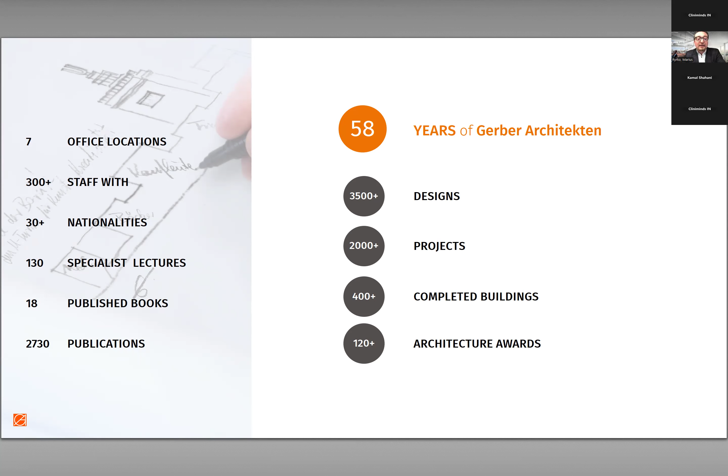Our office locations form a triangle of where we currently are. As you can see, the base is in Germany, very strong. I'm based at the headquarters in Dortmund. Linda is in the Münster office, which is the healthcare specialist office. Then we have other office locations: we've been in Saudi Arabia for around 20 years, with an office in Riyadh and an established entity now. And we've been in China for about 9 years, running an office in Shanghai.

What that triangle of international activity means is that we benefit, and I believe this makes us unique: we benefit from the German engineering approach to how we design buildings and how we see construction. We've done mega projects in the Middle East space, very large scale, very high profile. And we've also built almost 1 million square meters in China with high rises, a very dynamic and highly competitive environment. We do hope that next time we sit together, we can say we've also got an office location in India, and let's see where that journey takes us.

Our activities currently stretch from China, Vietnam, also India, Central Asia. We have activities in Central Asia and the South Caucasus. We're also in the wider Middle East and in Europe.

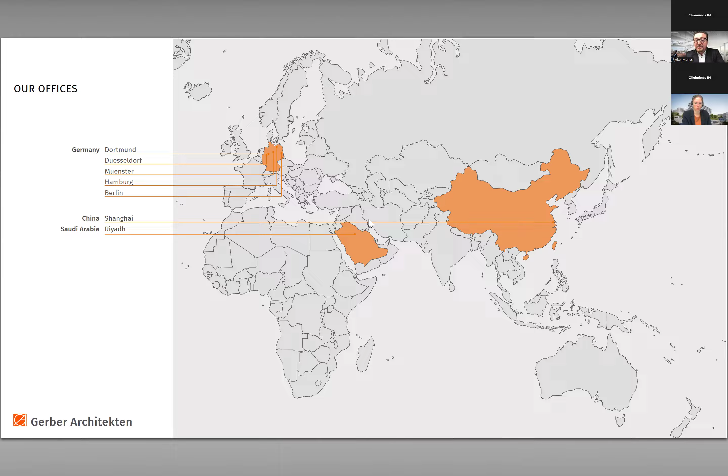This is the board of directors, together with Professor Gerber, Thomas, and myself. We run the international company. These two gentlemen run the German entity. Linda, today here with me, is director at the Münster office, as Kamal already introduced. We've got about 12, 13 directors running responsibly either office locations or certain sectors. And then we've got projects, and projects normally have project leaders, and that's how we're structured.

It's fairly straightforward. So what do we do? We are architects first and foremost, so we are interested in buildings, but to get there, we often have to be involved or lead certain topics on wider urban scale. So that is urban design. We've done design guidelines for various cities. We've designed also cities or city quarters for that matter.

Landscape is very strong. We're currently working on the King Salman Park in Riyadh, which is a mega urban regeneration project, 4 times the size of New York Central Park. Sustainability is an inherent topic in our world, and I will come to that later. We've made this one of the focal points of our presentation today. And whilst today is about healthcare, it's one of our leading sectors, also one of our growing sectors, particularly in the post-pandemic times.

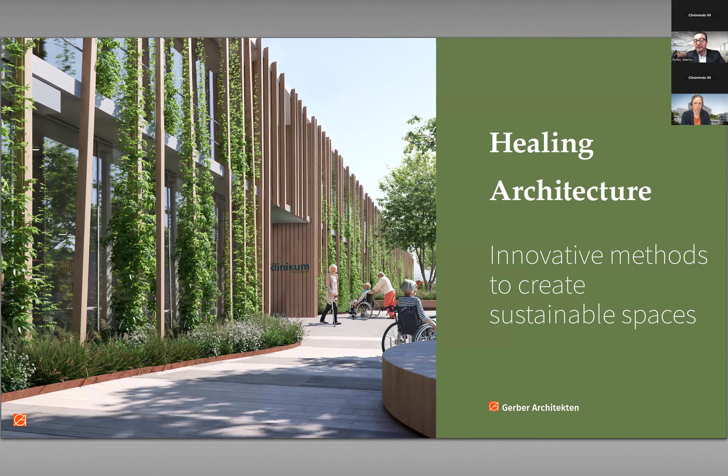Now, coming to today's topic, healing architecture, what we want to do is to show you on certain projects that we're doing how we approach our design, how our design thinking materializes in the projects, how we see it through, and what we're trying to achieve. And we'll do this with a focus on sustainability.

At this point, I would like to quote Professor Gerber: "Sustainable thinking and sustainable action is necessary in all areas of our lives, and of course, particularly in our work. Sustainability is crucial for our cities and, more importantly, for the people."

And, you know, I've been doing this also for nearing 25 years now. Sustainability has been a topic since I was at university. It's been ever more important in most of the countries that we're in. It's becoming a critical topic to design and build our buildings in a way where we watch out for the resources that we use, for the energy and the water that we use, and how we use them and how we reuse things. So it's become an ongoing topic.

Gerber Architekten are also a founding member of the German Sustainable Building Council. I think that's probably about 15 years ago, but we sit on many other panels and organizations, the European Association for Sustainable Laboratories. We run highly sophisticated quality management systems, and we also certify. So we see ourselves generally as a general design lead, and we coordinate, and we like to coordinate other participants on the design.

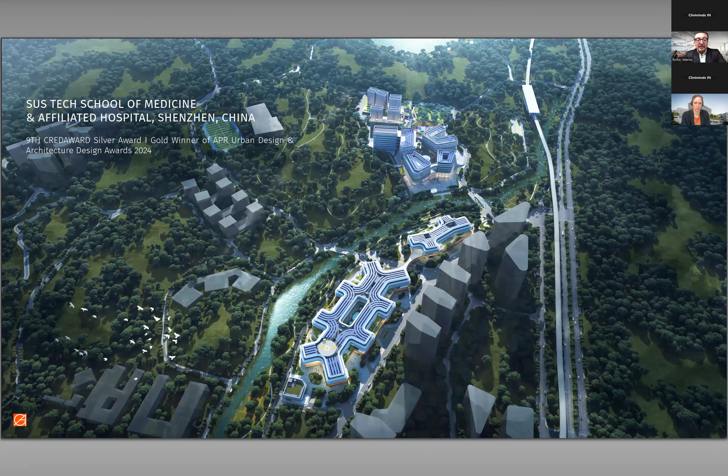Let's talk about projects now. I will take the liberty and start with a project because that's also been part of my time in the last 3 years. This is the SUSTech, the Southern University of Science and Technology School of Medicine and Affiliated Hospital in Shenzhen. They've got quite a long name, and the name stems from the fact that they are a clinic, a university clinic, and they also teach. And that's been a really interesting and also very challenging design exercise.

So the project location is in the city of Shenzhen. Shenzhen, as you may know, opposite Hong Kong on mainland China, the role model city in China. It's the city that has evolved from a fisherman's place 30 years ago to a 30 million city.

Shenzhen is also working and functioning very well in terms of all mobility systems, urban connectivity systems, quarters, quality of life. They've done many, many things quite right. It's also the place where the competition for architecture and international participation in China has been almost the highest, so it's the most competitive ground for companies like ours to compete in China. And we were very proud to win this hospital.

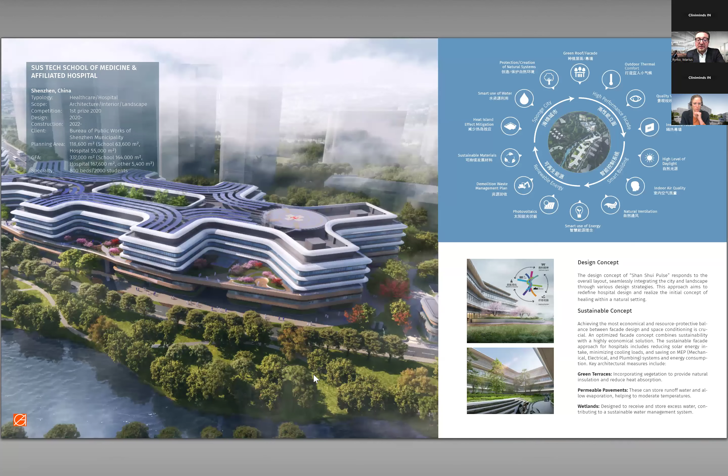So when we were starting with this competition, it was not just a medical exercise, it was also an urban exercise to fill the gap on these two plots of land. And so our idea was a little controversial. You would expect in a high density environment, and this is also the case in India mostly, a high-rise hospital. Most hospitals in China will be large buildings, similar to what you see behind Linda's screen. This is a university, but that could also be a similar typology. We didn't do that because we felt this project can particularly benefit from the greenery immediate from the Dasha River and from the hills, and let's try to give the patients, or let the patients benefit from the views into the landscape.

We are firm believers that nature and a natural environment promote well-being and rehabilitation. I think this is a very natural thing to say, but it's very hard to implement in the urban environment. So what we're doing is pushing the trend of regreening our cities and letting nature inside of our cities. This project, basically, focuses on that. So what we introduced as part of what we call healing architecture is a healing garden here at the roof level, at the podium level.

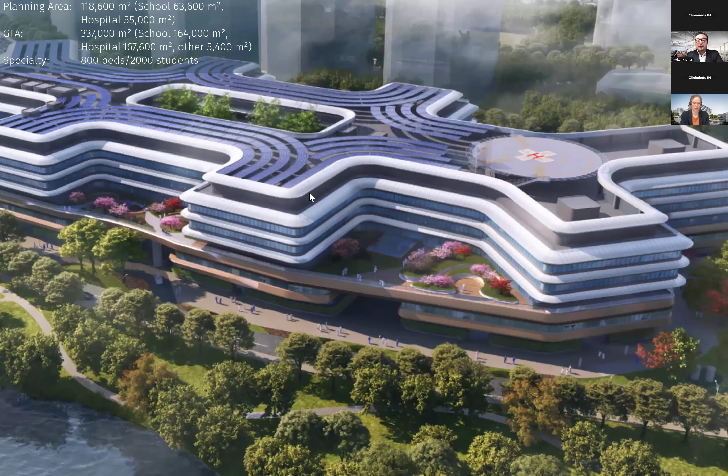I'll just zoom in a little bit to make that more clear. On the lower levels are all the medical functions - everything, examination and treatment, surgery, emergency, outpatients reception, inpatients reception - everything that is logistically important for the building is happening on the lower 3 floors. And then on the upper floors, you have the wards, or the nurseries for that matter.

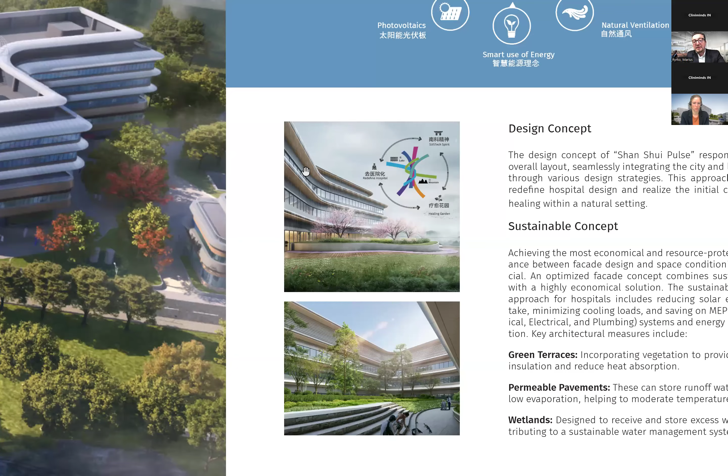The idea was to give the patient a more human scale view. We call this design approach the human-centered design approach, and I will demonstrate that from a patient's view. When you look out of your window of a room into the building, you don't see the large building, you don't feel anonymous, just like a number among many. And this is an 800-bed hospital. You feel quite human and quite private, and that gives a sense of comfort. And with the connection to the natural environment and the green roofs, it is intended to promote well-being.

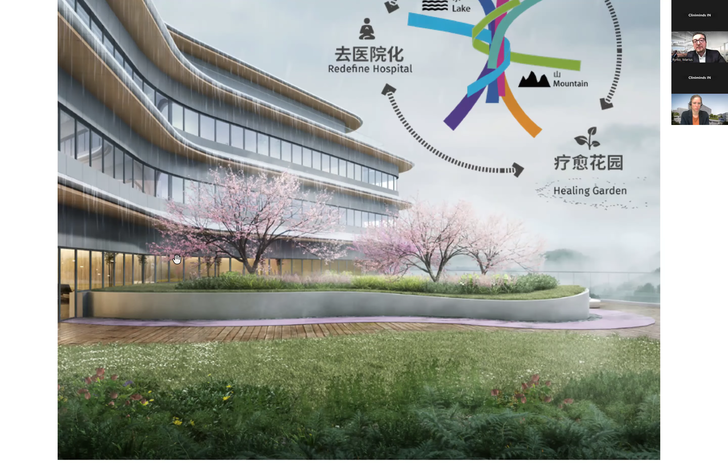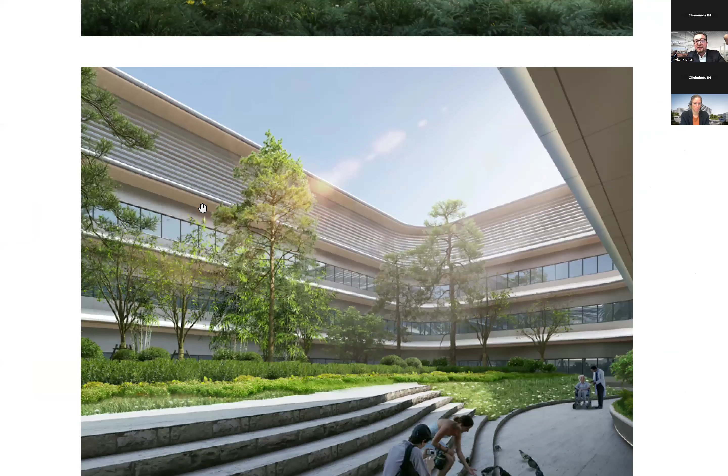And we designed this on most spaces in the building, so that goes through courtyard spaces on the roof and other spaces as well. So wherever you are, you benefit from that logic. And then let me just go back briefly to show you the urban context again.

When you see the hospital here, this is the hospital body. And during the project, the client gave us an instruction to outsource the infectious diseases unit, which is that outbuilding here. This was right through the pandemic - we had designed this just before the pandemic. So most projects in China had a running change in their design to move away the infectious diseases units.

Then there's a training center for nurses and doctors here - they still have some patients there. And then we can bridge over to the university part. This is the teaching part, it's all arranged around the courtyard. They've got an auditorium in the center, it's quite dense at the same time. It's a space that gives the students time to breathe, time to catch their breath, time to communicate.

They have teaching spaces here, a library, canteen, and teaching laboratories. They also have animal holding, small animals, of course. And then at the back, what you see here is recreation and housing - residential, this is where the students live, this is where the guests live. So everything becomes an organism rather than a building. This is a world.

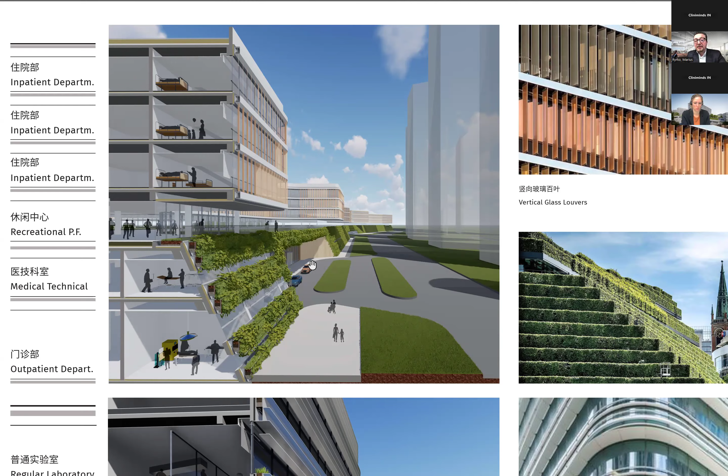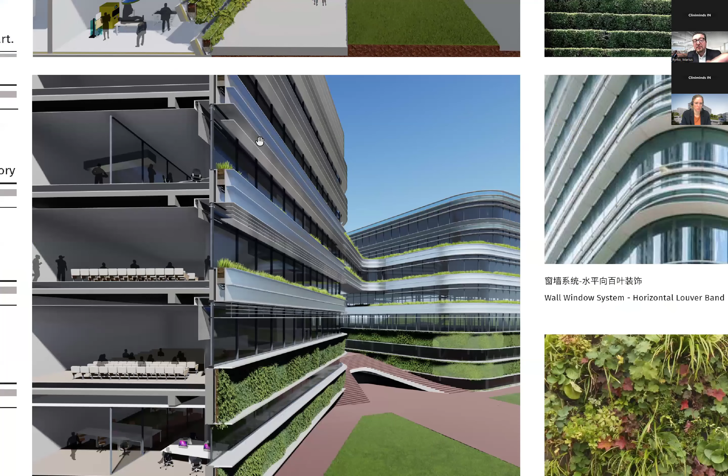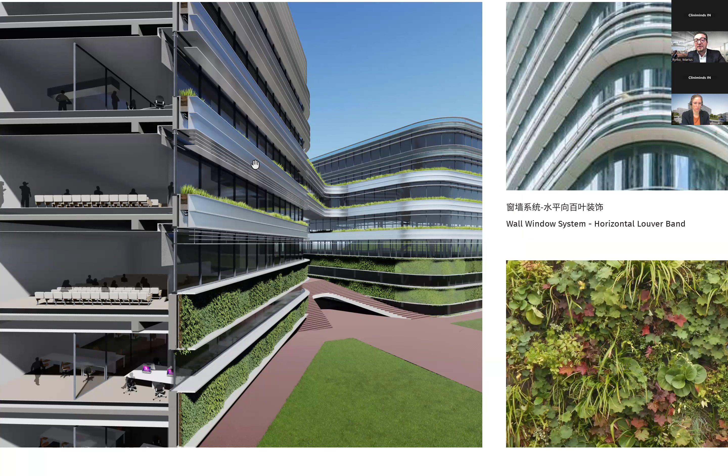We designed these systems ourselves, but there are also examples from other colleagues across the world, like this one in Germany. Of course, this is quite a high maintenance idea. It's not a water or irrigation or technical issue in China and Shenzhen, because Shenzhen's climate is very lush and pretty much everything grows. In other climate zones we have different discussions, including plant selection discussions. That won't be the case here, but as you know, people still have to maintain them.

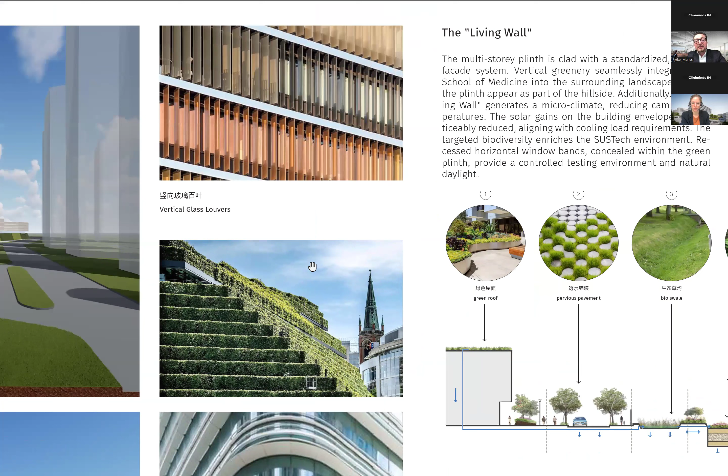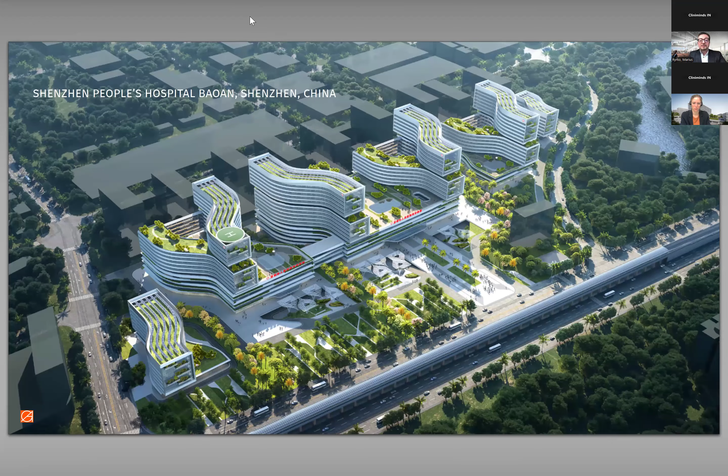Over the course of the project this did not get built, but the facade was also discussed quite intensely, and we designed the whole facade. If you look at the fingers of the building I showed you earlier, they have different orientations, so the facade was designed with vertical screens to keep out the sun as much as possible. The rotation of the screens was calculated by means of a sun study, so you always have the most ideal situation in each individual patient room based on the rotation of the louvers.

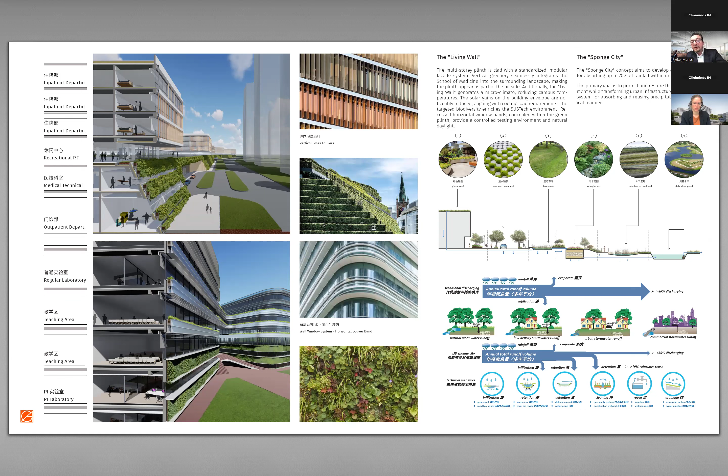Another thing on sustainability in hospitals that is transferable here is a specifically Chinese governance item worth mentioning in this meeting. China has defined what they call the sponge city. The sponge city is basically a water management government regulation to save water runoff and reuse water. That's also happening in Europe, in Germany, and other places. There are different names for it, but it's essential and a political requirement for any public sector project. We typically have water management specialists involved in the project.

We also had that here, and through a mixture of greening the building and having retention and detention systems for the water, sometimes we also have to have water tanks and reuse of water. The total runoff is reduced significantly.

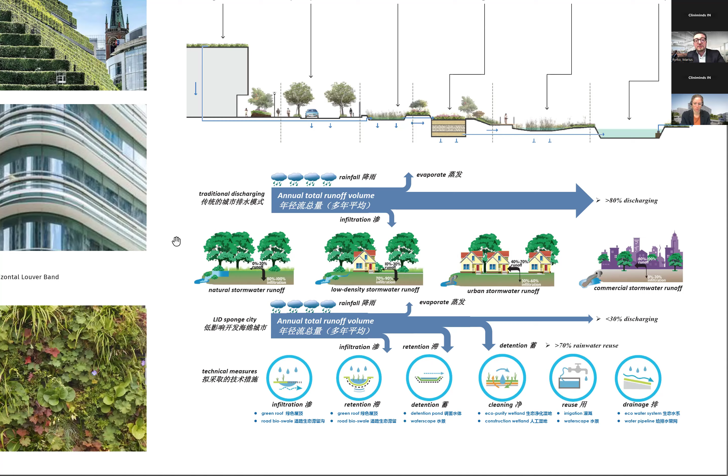Second example, I won't dwell on this in so much detail, is the Shenzhen People's Hospital in Bao'an, China. This was a second prize competition that we won with a local partner. We always work with local partners and architects. This is also quite a large hospital.

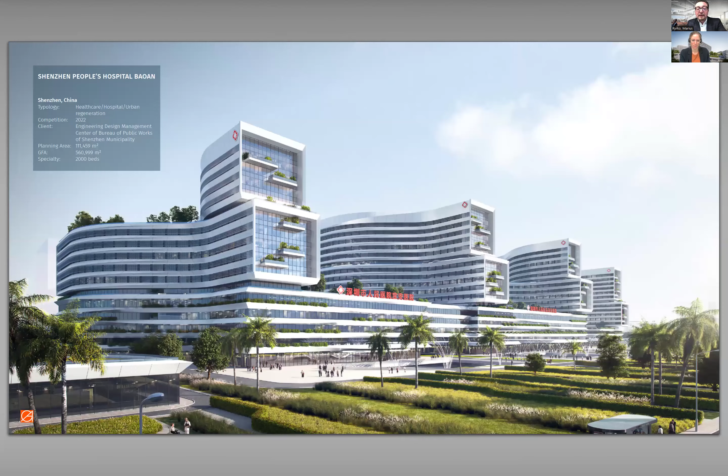This is what it looks like from close. It's quite a large hospital. I think this had 2,000 beds in it. So it becomes, at this scale, hospitals become an urban fabric exercise.

Different governments will have different views on how they want to develop their urban environments. We are also part of various discussions at higher and mid-level to help, particularly emerging economies, do that. Sometimes these designs will be judged by a jury panel - we also have that very strongly in Germany. Sometimes the public sector or the client will take the judgment, and typically decisions, particularly in China, tend to be either top-down or consensus decisions.

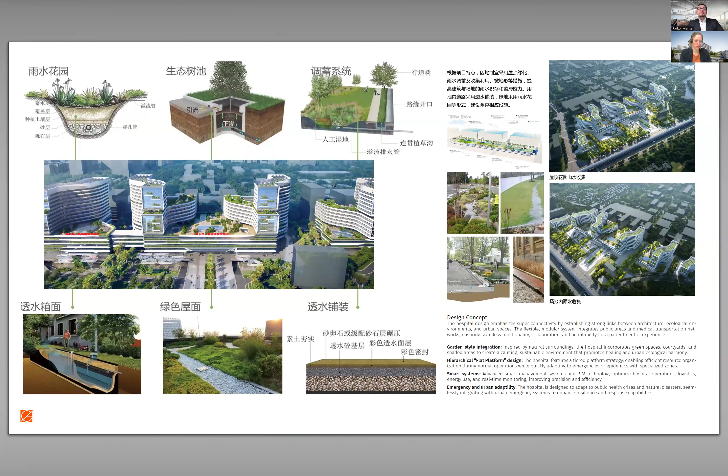Okay, thank you, Marius. I will go further on with two other interesting current projects. This is a clinic in Osnabrück, in the northwest of Germany. This project was won as a competition last year as a restructuring and renovation project.

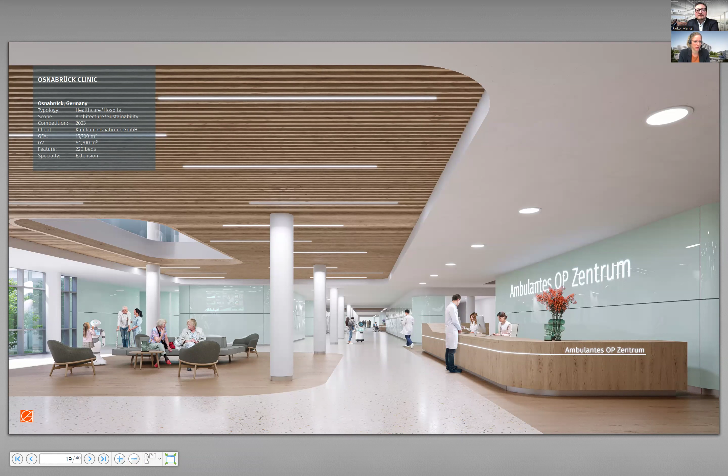The restructuring and renovation of the functional areas is an important component regarding the master planning of the clinic, to provide a sustainable development as a location for maximum care. You can see this here. It's a clinic with 220 beds and it's an extension project.

The clinic's ecological self-conception as a green hospital should also be reflected in the structural design, as you can see in the pictures. The design concept is to create a digital, efficient, and people-centered clinic that forms the structural basis for intelligent, environmentally friendly, and gentle medicine. The idea is to center the specialist departments to offer the highest possible medical quality standard for the patient. To achieve this, all non-medical functions are first relocated from the main building to create space for the high-quality medical and technical centers.

The long and previously very narrow double main corridors will be combined and expanded to form an open, bright area with views into the green courtyard, as we saw before in the other project, because this is a key pillar. So the new centers have their central ward hub attached to the open waiting areas.

Now to the sustainable concept in this project. We have here a green facade, visible from afar, which visually ties all functional areas together and forms the green connection to the landscape. So you can see the plan there - the master plan is also located in a green space. With its energy efficient post and beam construction made of timber, it represents an ideal solution from a sustainability perspective.

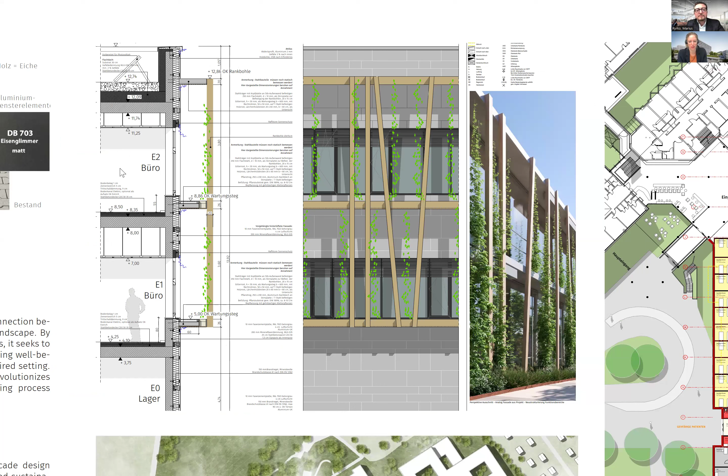Fast-growing plants climb on the wooden structure, providing effective sun protection and generating evaporative cooling. Warm wooden building materials dominate the interior and exterior, contrasting with clear light wall cladding made of glass. Here you can see the facade and the plants on the facade.

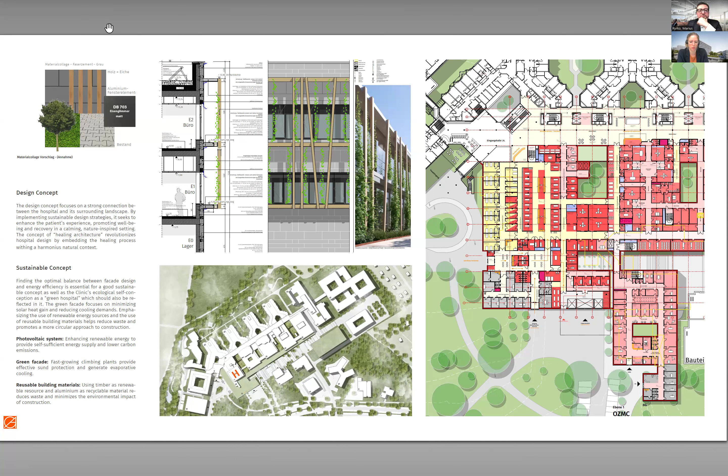Also the building materials that can be reused after demolition are used in this construction. This is where the cradle to cradle concept comes into play. The requirement is the avoidance of questionable building materials and consistent product responsibility in this project.

Linda, because this is such a complex building in the existing context, can you maybe elaborate on existing and new for the audience? I think that would be quite interesting. It's very special what we've done. So this part is the new parts, and this part, which Marius shows, is the master planning.

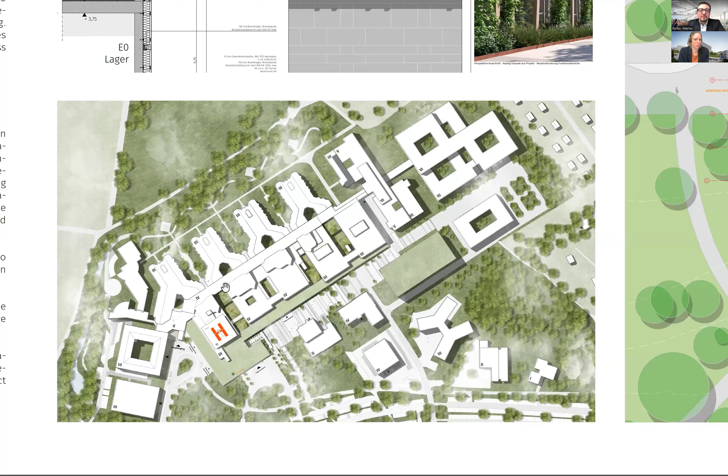At the end, this project is about three smaller projects. One is this functional area project. Then we have the energy center (Energiezentrale). And we have also another project of care, the technical center (Versorgungszentrum). At the end, this clinic is a clinic of maximum care, located in the northwest of Germany, and they are responsible for a lot of smaller cities in the closer area.

I'll just zoom out for you again. Okay.

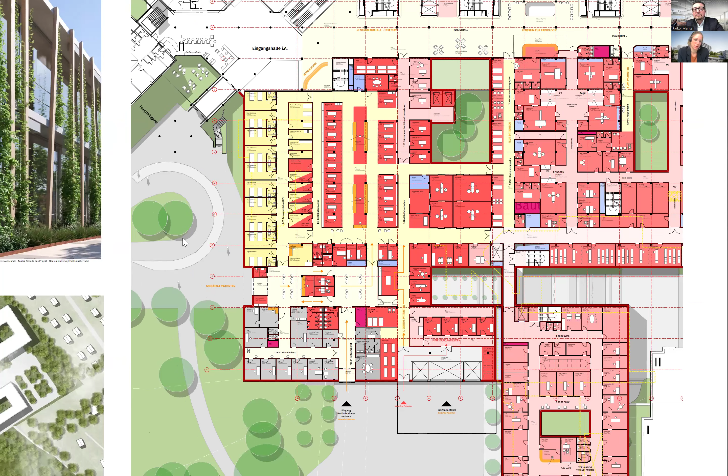So here on the right side, you can see all the colored areas. These are the new parts which we are planning for the renovation and restructuring. It's a very complex task to do this in a clinic, so it's not a new building project.

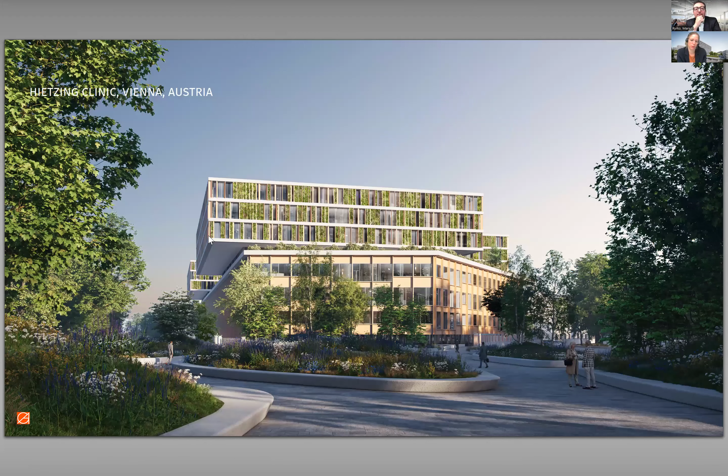Okay, then we will go further. This is another project, the clinic in Austria. This is a competition project as part of the modernization of Vienna's clinics, so it's located in Vienna, the capital of Austria. This was an EU-wide open design competition for the overall development of this Hietzing clinic. Our design for the competition of last year is conceived as a sustainably designed hospital landscape embedded in a historical building ensemble.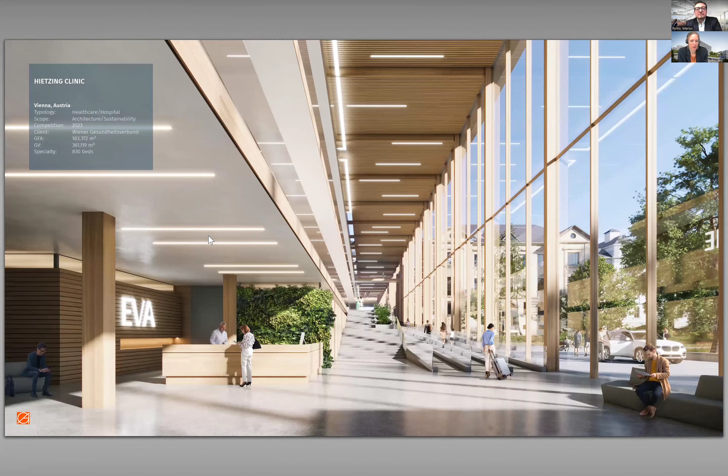So as you can see here, the 830-bed hospital concept is to create a digital, efficient, and people-centered clinic. There are 2 main objectives: to create a clinic with short distances, both construction and infrastructure-wise, and its integration into the large hospital park to serve the well-being of the patients. This is what healing architecture means.

And on the next, we can see also the master plan on the right side, and here you can see how the clinic is embedded in this historical park ensemble.

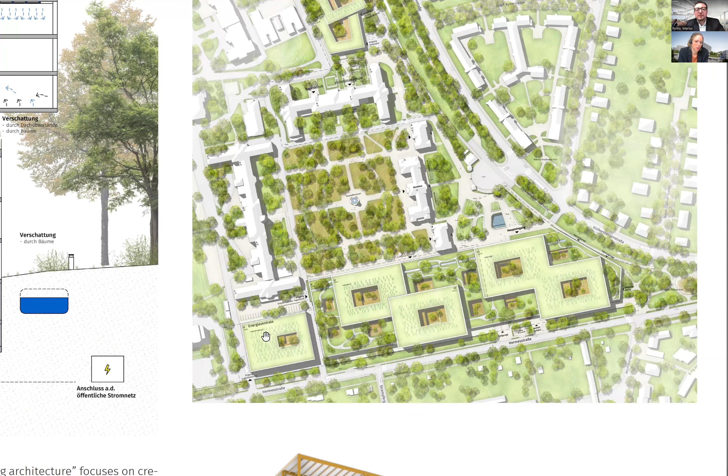Can you talk us through a little bit through the project, Linda? Yeah, when you go a bit out. Yeah, yeah. So because I'm more concentrated on the technical parts.

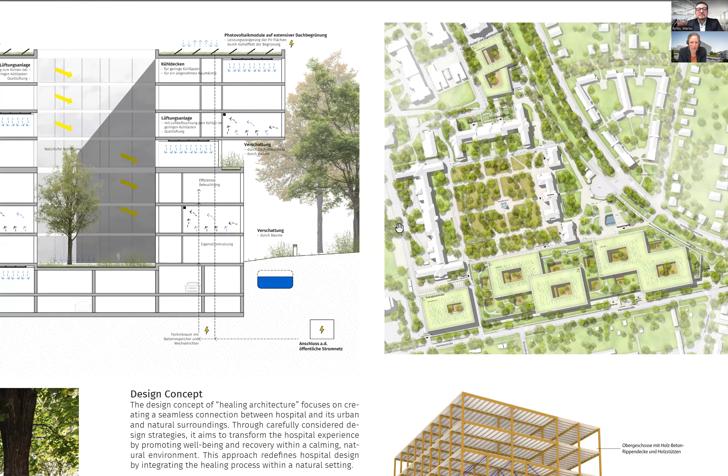So we have 4 floors for examination and treatment, and this forms a base on which 3- and 2-story building bands, as you can see here in the section, are arranged in a loop. And this loop we saw before on the master plan.

And the main corridor, cascading according to the topography of the site with its rest and orientation zones, forms what is called the vital heart of the new central building. So the transparent 4-story facade of the main corridor integrates both the park and the adjacent buildings of the historic site into the interior.

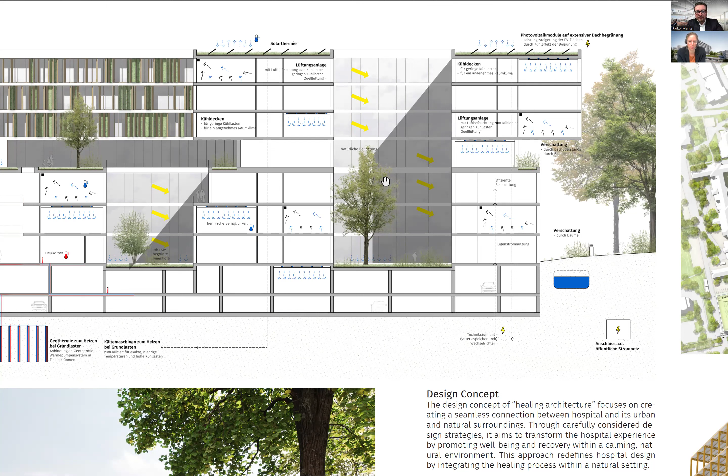And this is also combined with the sustainable concept. So healing architecture, as a key pillar of the conceptual quality of our new clinic building, enhances the integration of the different natural spaces according to its topographical location, because the topography was here a big task.

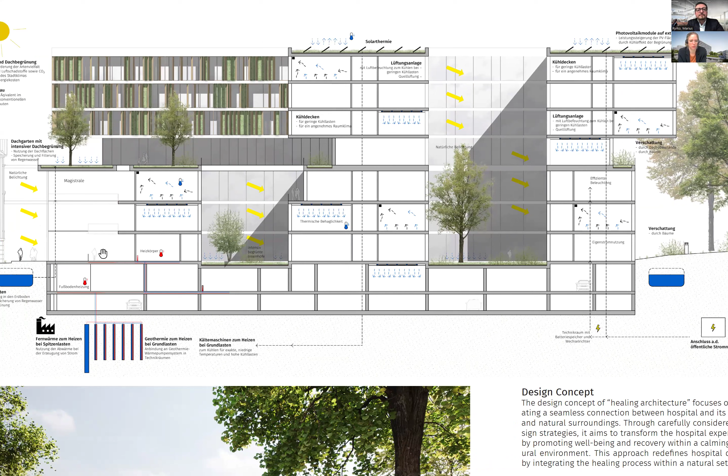The facades take up the green diversity of the landscape and appear as vertical dancing wooden panels, which provide shade for the interior and offer support for climbing plants in the spirit. Also here we have this aspect as the living wall.

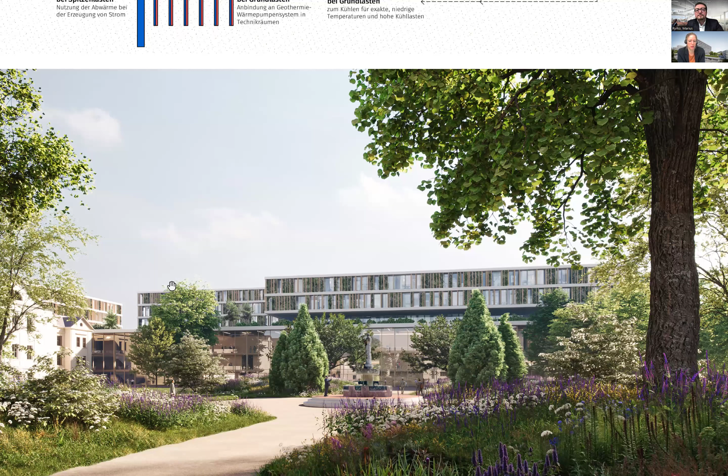And the roof is designed as an intensively greened retention roof and is equipped with photovoltaic systems.

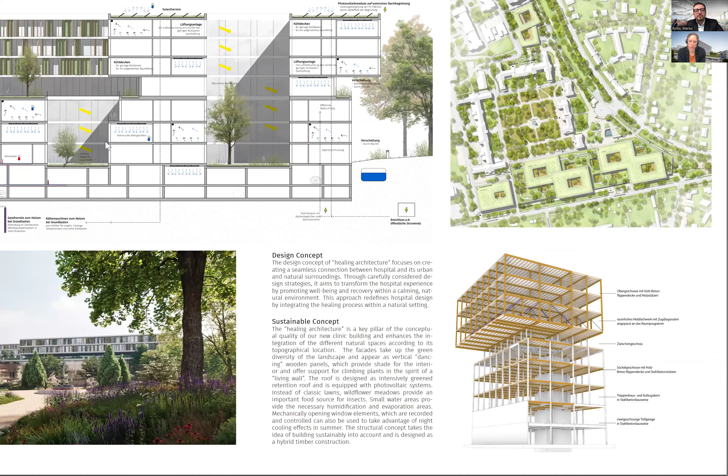Then also the landscape architecture aims at the idea that instead of classic lawns, wildflower meadows provide an important food source for insects, and small water areas provide the necessary humidification and evaporation areas.

And further on, what you can also see in the section is that mechanically opening window elements, which are recorded and controlled, can also be used to take advantage of night cooling effects. You can see this here where the yellow marks are.

So the structural concept takes the idea of a sustainable building, also here by hybrid timber construction. Okay, for this project.

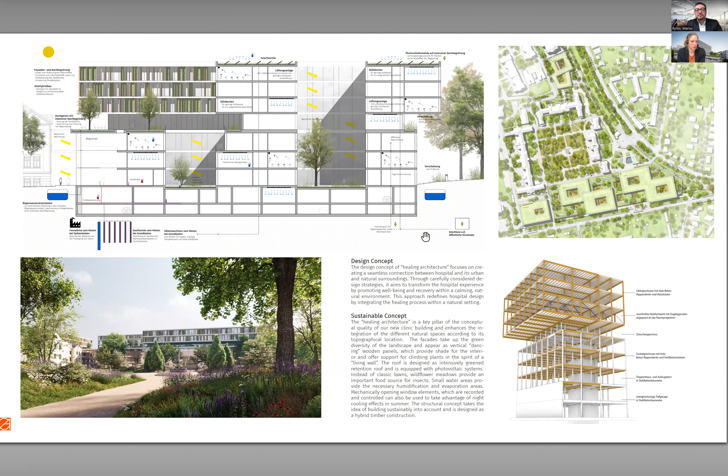Now we would like to introduce you a bit to how we work, to demonstrate sustainability in action. Our working methodology is to ensure quality management in all stages, as the development of the core of quality assurance in relation to the organization and execution of the project.

So we, as Gerber Architects, have a manual. This is the methodology 'Planning the Planning', which provides optimal control and planning for the processes that occur in everyday planning. We develop variant concepts with cost analysis in agreement between the client and the user in close coordination. In this coordination with the client, we also offer to carry out subsequent programming and user workshops to optimize previously defined spatial requirements if necessary.

And what is also very important is the early involvement of the responsible authorities. That helps us to ensure that planning security is achieved at a very early stage. All this together forms lean methods to move quickly and sustainably through projects.

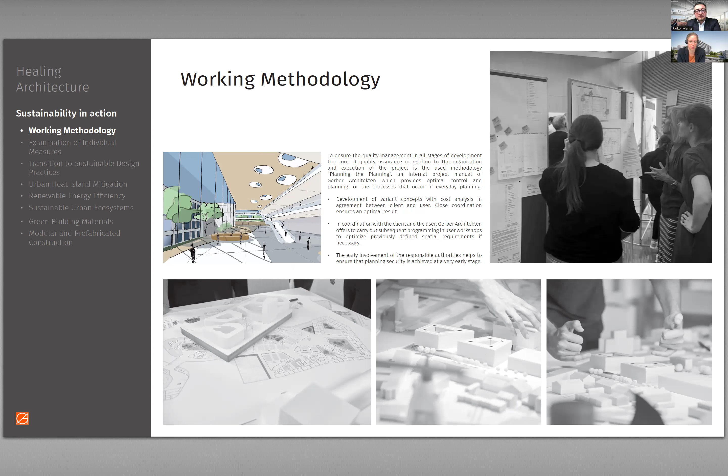The next one is the examination of individual measures. So in a very early stage of planning, we suggest various ideas of sustainable concepts to find the perfect measures for your individual project.

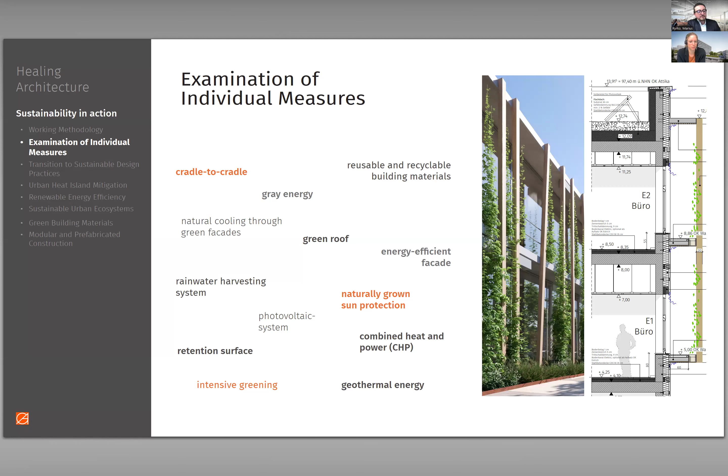So some of the most common measures we can see here, we show you now. The first one is the transition to sustainable design practices.

For example, at our clinics we incorporate a range of sustainable measures to enhance both environmental performance and well-being of building occupants. So we have the green facade and intensive green roofs, which not only provide natural insulation, but also improve biodiversity by supporting plant life and reducing urban heat island effect.

And we have solar panels and photovoltaic systems combined with the use of geothermal energy, and this allows us to harness renewable resources, significantly lowering the building's carbon footprint.

So then we have also the integration of rainwater harvesting systems to reduce water consumption, while retention surfaces effectively manage rainfall runoff. And then we have the choice of hybrid timber construction, which ensures a low environmental impact, promoting sustainability through renewable resources.

And then the native tree plantings and the sowing of bee-friendly meadows around the building help prevent excessive sealing of surfaces and foster biodiversity. So then the next folder is about urban heat island mitigation, because due to human activities and other factors like dense construction, limited vegetation, and heat-absorbing surfaces, the temperature in urban microclimates rises and becomes much hotter than nearby rural areas.

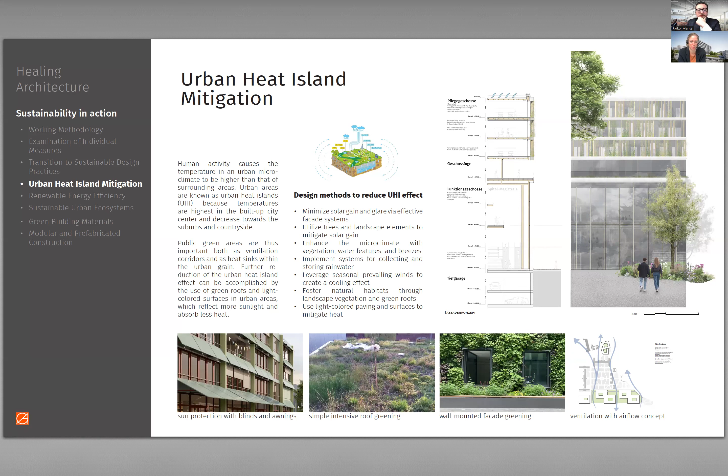Then we come to renewable energy efficiency. So the energy is derived from natural resources that are replenished naturally and are, in that sense, sustainable.

Yeah, so we... just lost you. I thought it was an audio problem. Can you hear us again? Hallo, hallo? Yeah, we can hear you now, okay.

So we had also here the sponge city concept, which Marius told you about before.

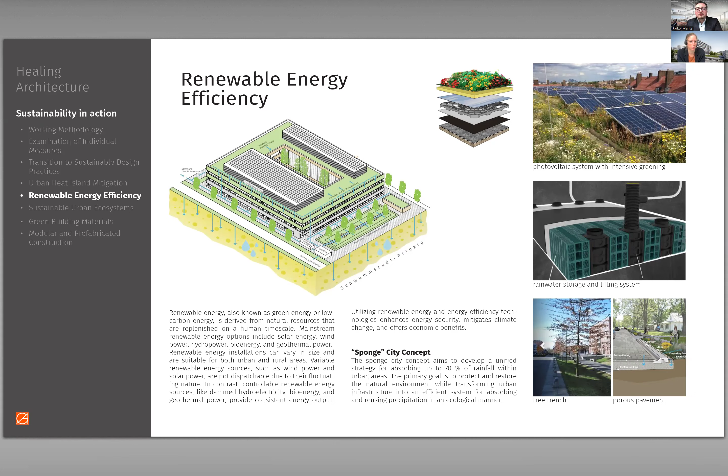And then the next folder, we have sustainable urban ecosystems. That's the next folder. We also had this before, that our design and the landscape is a very important thing, that they come together. For example, selecting native biodiverse vegetation benefits from being adapted to local climate conditions.

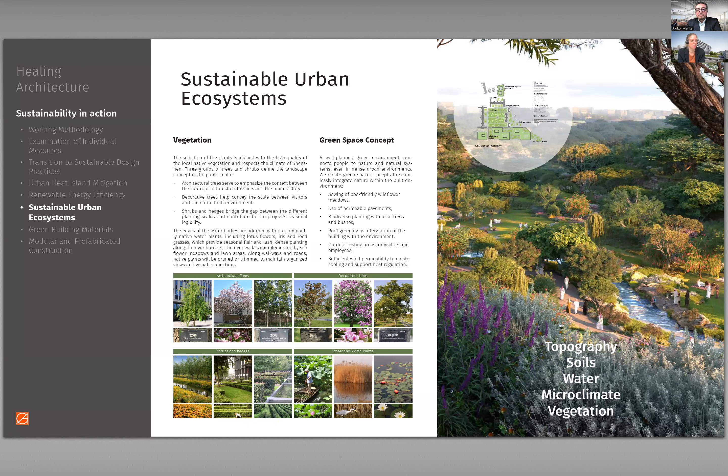And then we come to green building materials, the next one. Also here the example of the timber construction as the renewable resource.

And then next we come to modular and prefabricated construction. Here, for example, this is also a big chance for the clinic projects. Modular and prefabricated construction promotes sustainability by reducing waste, lowering energy consumption, and minimizing on-site environmental impact.

And we have one project you can see here on the right side: the St. Barbara Hospital. This hospital is also located in Germany. We faced a significant challenge with limited space and insufficient hospital beds to accommodate the growing number of patients, so we suggested a concept of modular expansion and prefabricated construction.

And so we have the advantage of complete prefabrication, which ensured that each building module met high quality standards, and this you can see also here came equipped with pre-installed electrical equipment, including wet batteries. So in summary, a modular medical building saves resources, ensures hygienic standards, and offers quick construction.

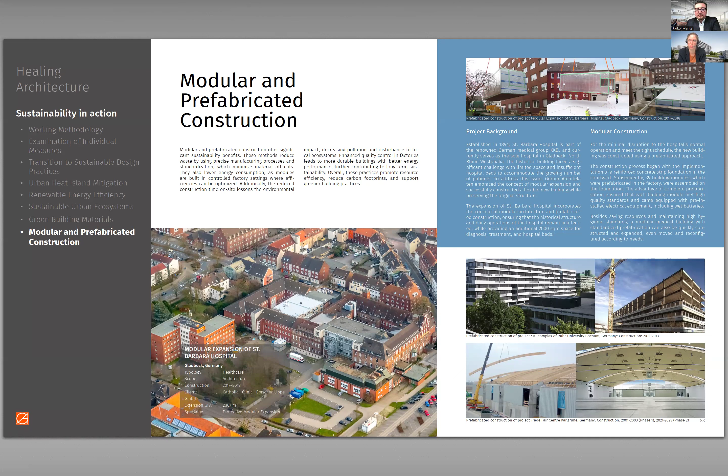And this is also a good thing sometimes when there is not so much space. So then we come to Inspire Visionary project.

So our goal is to have the vision of healing architecture. We have sustainable healthcare, which provides high quality, affordable care by balancing three points: the environmental, the social, and the economic point.

And then on the other side, smart health refers to the integration of advanced digital technologies like telemedicine or new devices, and also AI diagnostics to provide monitoring. So also this can be integrated in the project.

And then altogether, humanity design is the big point in our project, as we told you before, for the healing architecture. So looking at the interior of our clinics, the inside and the outside play together, and also we have several other aspects which play a role too.

So wheelchair accessibility, hygienic concepts, color concepts for orientation — these are also some examples from our projects.

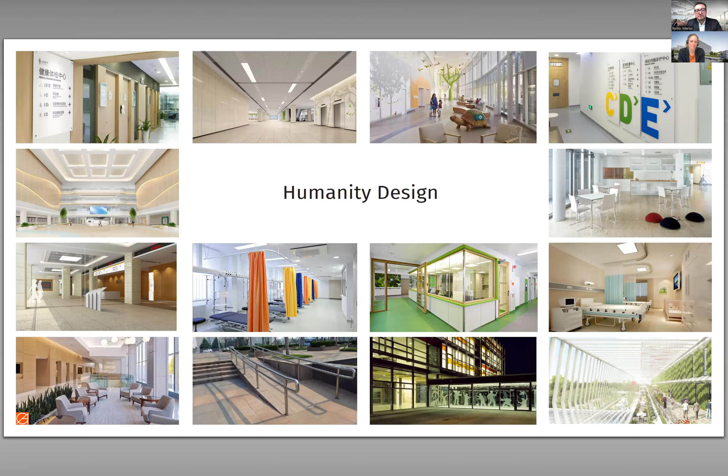Facilitate knowledge exchange and inspire collaborative opportunities. That means we encourage partnerships and teamwork to share our ideas and expertise, so that we can lead together to innovative solutions and shared goals.

And yeah, that's wonderful.

Thanks, Linda. What I'm hoping to demonstrate to the audience is the complexity of our approaches and the adaptability to each context. So you've heard some of the specifics of how we adapted those philosophies into the Chinese context, and you've seen how we do things in Germany. There's always quite difficult and sophisticated discussions of what exactly applies. So the main message here really is that we've got a breadth and a wealth of knowledge, and we're very happy to liaise.

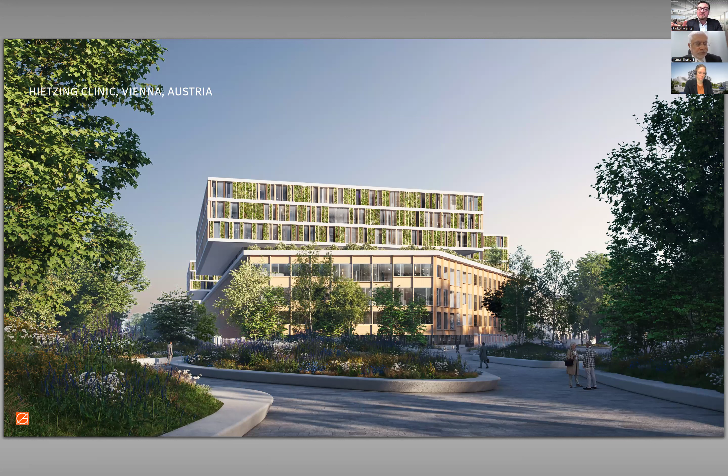It's important that the local partner is involved early on, because every question that we had—if you design a courtyard, what happens with fire protection? That was a prime example. If you design vertical, how many stairways do you need? If we have a vertical garden, how does that actually work? All these conceptual ideas need to be tested, and then we'll have a conceptual design.

Typically, we take our designs up to schematic design plus, sometimes detailed design, and we will normally have a role in site supervising—it all comes down to the available fee, of course. That tends to be the way things are. In the Middle East, they also employ us for site supervising with expats. I don't expect that to happen in India.

And I think China, as a market in terms of conditions and competitiveness on fees, is a good example of how to collaborate. We've got 10 years of experience of various models within what I just described. There's various shades of gray in how we can manage that and still contribute and create value.

Thank you very much, sir. Appreciate it. Thank you, thank you.